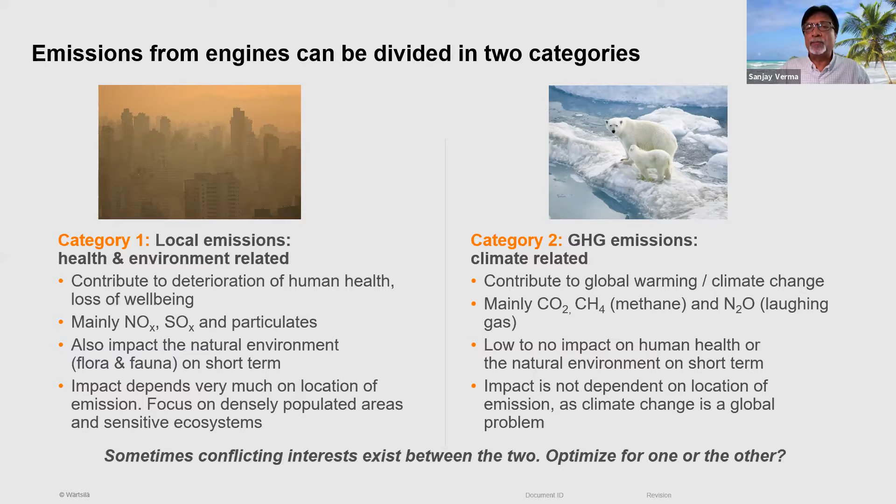IMO, in 2018, came with an ambition level to reduce global shipping carbon intensity by 40% by 2030, and greenhouse gases by 50% by 2050, gradually phasing it down to zero within this century. This is to ensure that global warming remains between 1.5 to 2 degrees Celsius. Well, that is the regulatory part of the drivers.

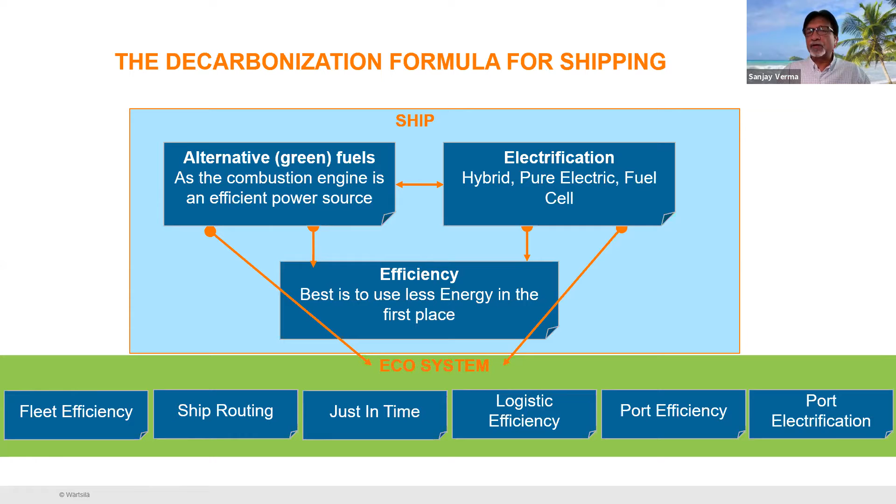But if the ship is efficient and the ecosystem is not efficient, then again, there is a problem. The fleet efficiency: the ship can come very economically or efficiently till the harbor, but if it has to wait for 10 days at the harbor, then all the efficiency is gone. If it comes to port and the cargo is not ready, again, there is a loss of efficiency. So the ship and the ecosystem should communicate. And that is the focus in decarbonizing shipping. So you decarbonize the ship and make the ecosystem efficient so that you take care of all this waste in the industry and turn it into efficiency.

Now, when we look at the ship, there are two parts again. One part is the fuel pathway and the other part is the vessel itself. So you look at how you generate energy on the ship, how you distribute energy on the ship, how you reduce the need of energy to go from point A to point B, and how you optimize the voyage itself by having good inputs of weather, how the sea is, and availability at the port, so that you can optimize your voyage itself.

Then going on the fuel side of it, there are two pathways. One is the liquid fuel pathway, and the other one is the gaseous fuel pathway. How we see it today, we are calling LNG a transitioning fuel, and tomorrow it will transition into other future fuels, which are either zero carbon or carbon neutral fuels. Same goes for liquids: today we have heavy fuel and gas oil, and in future we can see liquid biofuel or methanol or synthetic methanol. So there are two pathways for the fuel as well.

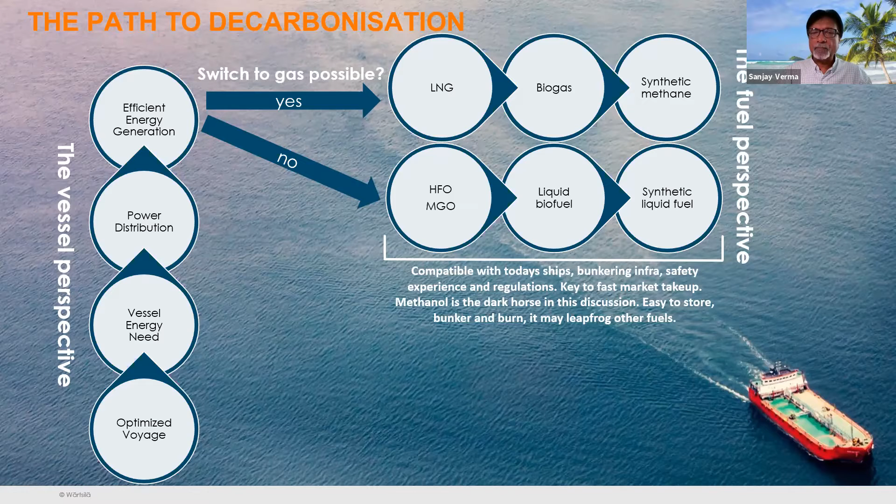So when we are looking at these fuel options, what are we looking at in future? We are looking at LNG, ammonia, methanol, and hydrogen. These are the four most talked about fuels today for the future. Especially for ammonia, methanol, and hydrogen, they have to be green, not the ammonia or methanol that you get today. Those are made from fossil fuels, so they are dirtier; their footprint is much more than that of your heavy fuel or diesel fuel.

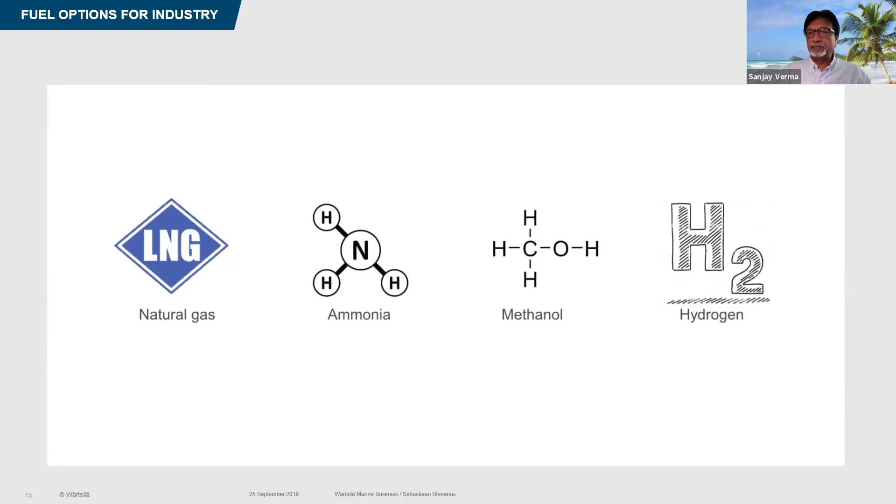But they all have different properties, and these properties are not all good. Say, for example, we look at storage. When you're looking at hydrogen to be stored in a smaller volume, it has to be liquid. And if it has to be liquid, it has to be super cryogenic, minus 253 degrees Celsius. Today, we are having problems with LNG in storage, but hydrogen is much more cryogenic than that. Then ammonia and methanol are somewhere in between. Methanol is the best fuel among these four when it comes to storage.

But then you look at the other part. The heating value of methanol is 3 times less compared to the fuel that you are using today. So again, it has some problems. Ammonia is there, but again, it has problems in its toxicity and how to burn it. It has a corrosive nature as well. So all these have different issues, and then availability is the main challenge of the green or zero carbon footprint fuels.

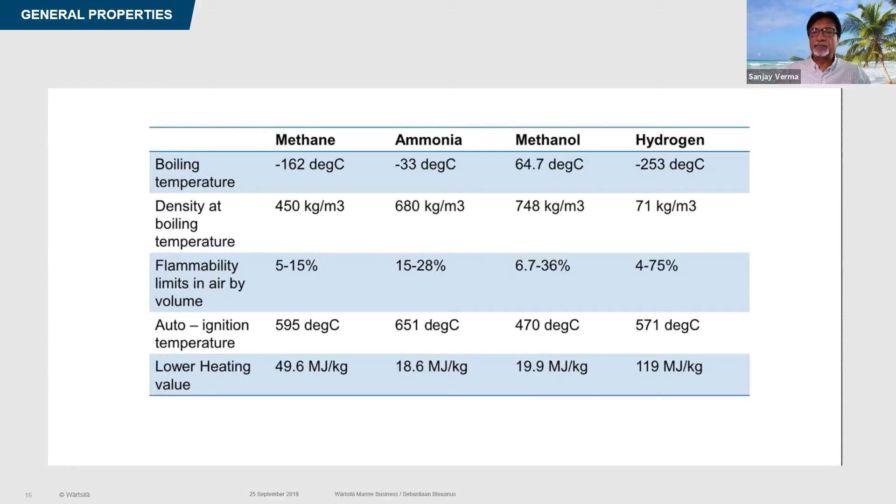So just to represent it in a graphical format, for the same volume of fuel which you carry on the ship, with hydrogen you can go for 5.3 days, and with LNG you can go for 14 days, and both ammonia and methanol are somewhere in between. So in future you would find that it won't be a single fuel future. It will be a mixed fuel, depending on the ships, which are very different. There are certain ships plying near the coast, those plying in the harbor, and then you have international shipping. International shipping will follow a different pathway, but coastal and near shore vessels may have a different fuel in the future.

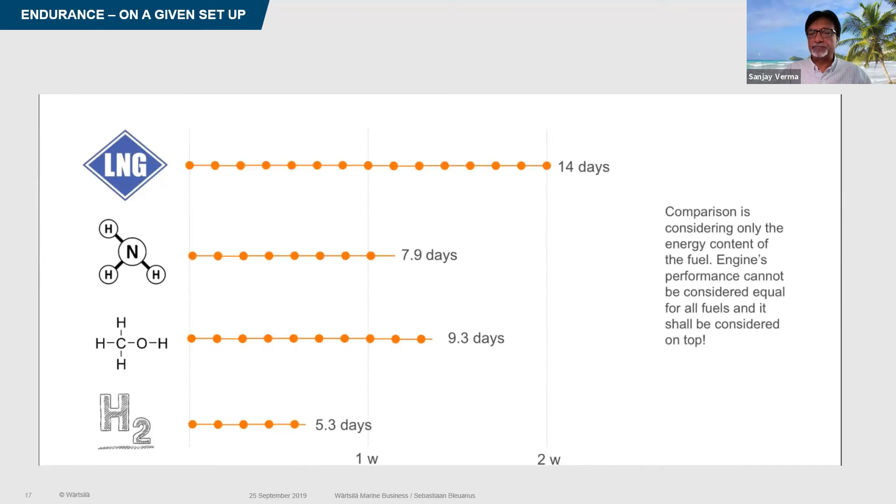Looking at Wärtsilä, where we are in terms of these fuels: when it comes to LNG, we have had these engines since 1986 actually, and in the marine industry since 2003, and we have more than 4,000 engines operating. So this is a well-established fuel for Wärtsilä, and it also has a proper pathway from fossil LNG today, to bio LNG tomorrow, to synthetic LNG in future. So it has a pathway to go till 2050 as well.

Methanol, we have been running this engine on methanol since 2015. So we have an experience of more than five years actually, and this technology is proven. We know how to burn it, but today the methanol that we get is again not a green methanol.

Ammonia: we have already started testing on ammonia, and we already have an order to supply an ammonia engine within 2022. So the testing has started. The real engine test will start next month, and next year we will be delivering this engine to a customer in Norway.

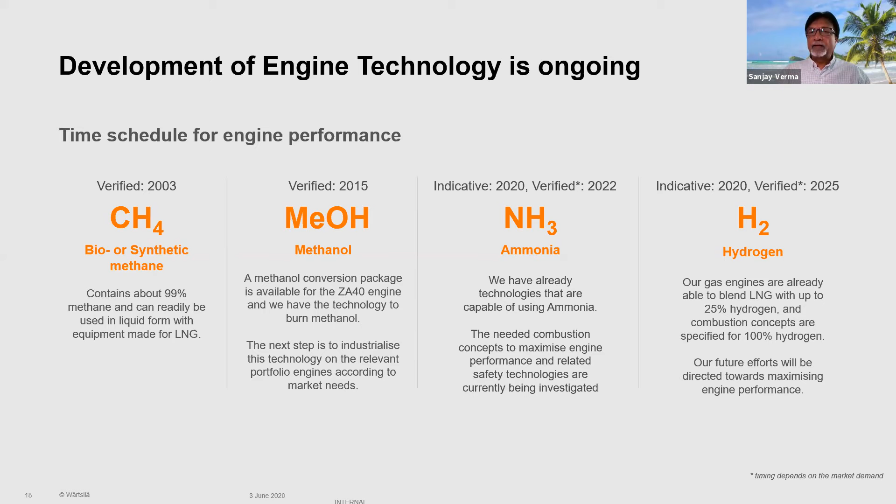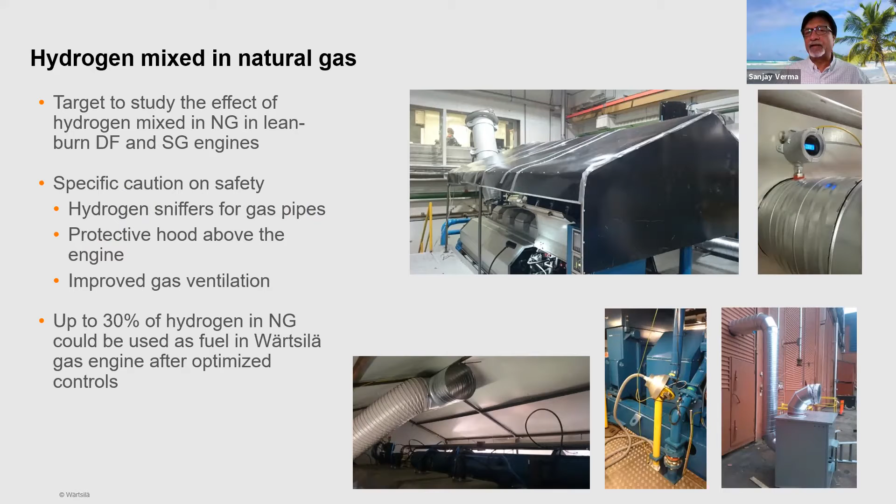Hydrogen: we have already tested a mix of hydrogen and ammonia, and hydrogen and natural gas, and we have burned a ratio of 30% hydrogen and 70% natural gas on our engine. We are testing a hydrogen engine, gradually increasing the hydrogen share, going up to 100% hydrogen. And this will happen, but we don't see it coming in the marine industry. The offtake will be more in land-based power plants, where gas and hydrogen can be supplied in pipelines.

At the same time, we are testing all other fuels as well. As I said earlier, LPG, methanol, ammonia, these fuels are being tested, and within the time frame I showed earlier on the slide, these engines will be ready.

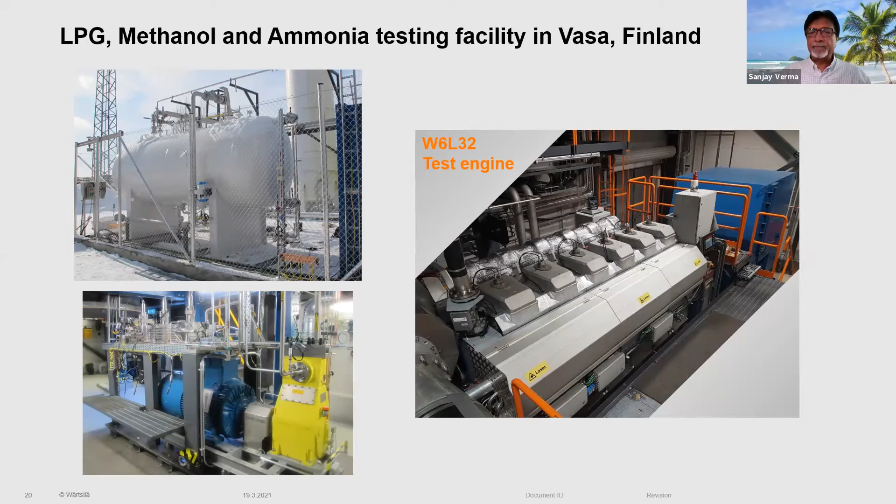Now I will go on to the energy efficiency part of the vessel. You will be hearing more and more about hybrid, and this is coming because of cost efficiency, lower operating and maintenance cost, and flexibility, because it can use the energy source available today and has provision to use the energy source of tomorrow. And of course, it is all being driven by environmental regulations. So it reduces your environmental footprint as well.

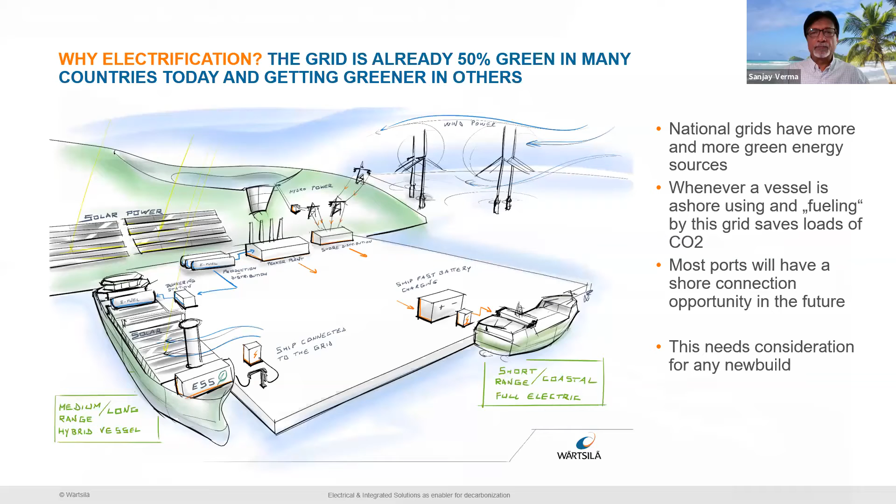Another industry which can pick up in Singapore very fast is electric or hybrid ferries. We see a lot of small ferries moving around Singapore, and these can easily get to this level of electrification or hybridization.

Another area of electrification and hybridization is port support craft, whether pilot boats, tugboats or other smaller boats which do not go far from the coast and could be charged from shore. There is a tendency to go hybrid as the first step, and the next step is electrification, a totally electric tug. So these are happening, and these will be the future, because it also provides a financially acceptable investment, meaning there is a return on your investment. So apart from meeting the environmental regulations, you also need to meet your financial points.

Then this is another area to make the ship more efficient, and we see more and more requirements. As you can see, most of the ships are struggling to meet the EEXI ratings which have been introduced by IMO, and further down they have to meet the carbon intensity, so they have to make the ships more efficient.

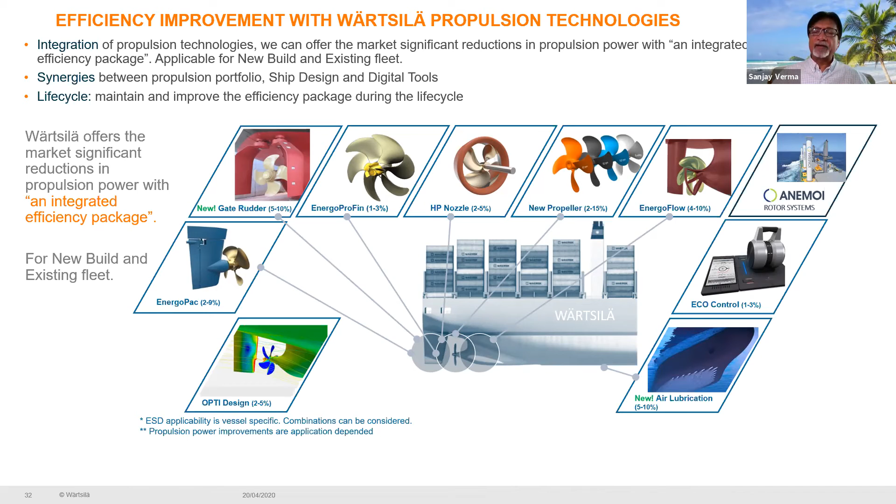Just to give you an example, on an existing vessel, by having a combination of these, you can improve the efficiency up to 10 to 18%, as you can see here. And the ROI, meaning the investment, is also within acceptable limits. And then again, the carbon dioxide reduction from the ship, which is required to meet the carbon intensity indicators.

Then again, this is another area where local industries can look at providing shore power. The more vessels are going to be electrified, the more will be the requirement for these. This is essential for the shipping industry to go towards electrification.

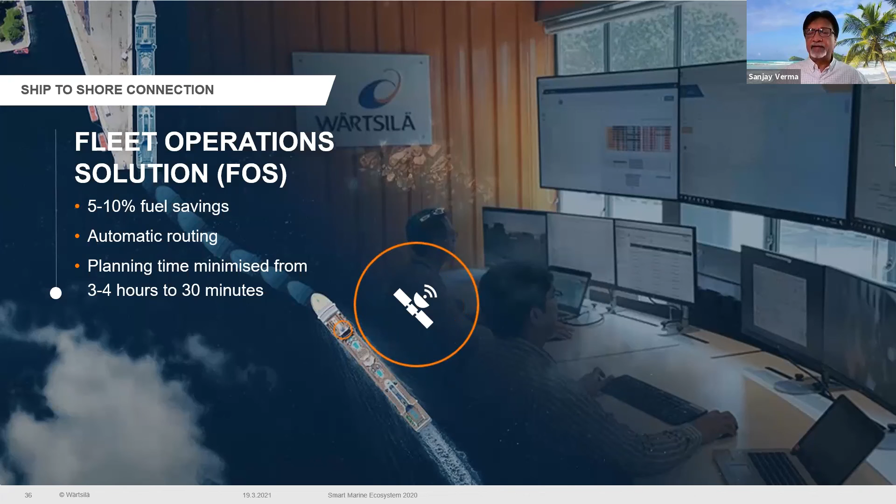Then there are these digital solutions, which are fleet operation solutions, weather routing, and electronic charts, where you can get real-time information on the weather and then improve your fleet efficiency. So this is more on the ecosystem which I was talking about. This is another example of just-in-time arrival, where ships can optimize their speed so that they don't have to wait; they go straight on to port. This not only improves the efficiency of the vessel, but it also improves safety when there are not so many ships at anchor.

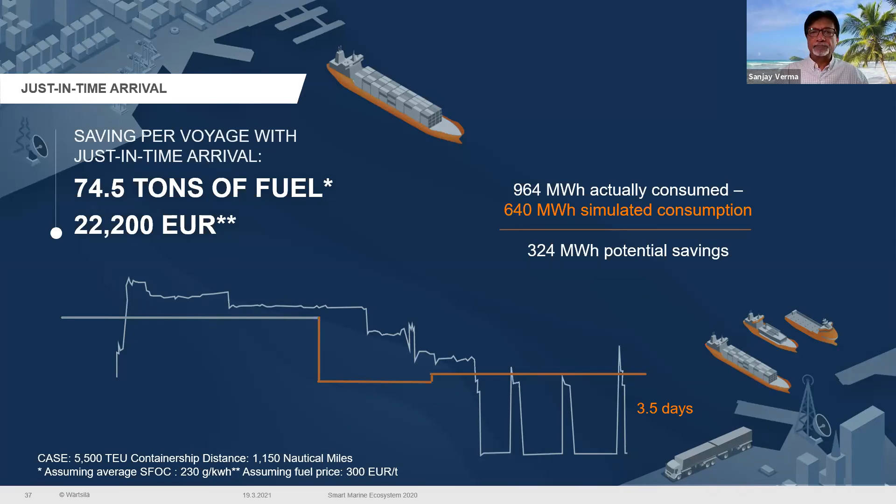So coming to the key takeaways, or a summary of what I talked about: there is no one single future fuel. At least the path is not clear as of now. There will be a variety of fuels in use, depending on short sea shipping, international shipping, or harbor shipping. So there will be different fuels in the future.

What needs to be done is that you think wisely and invest in fuel flexibility, because a ship has a life of almost 25 to 30 years, so that your vessel doesn't get stranded in future because of the regulations, because the regulations are going to tighten even further. So you have to keep that in mind and look at ways to make sure your vessel is not stranded. We feel that the dual fuel engine that we have is the right choice at this moment because the pathway is not clear, and it allows you to go on either the liquid pathway or the gaseous pathway as it becomes clearer in future which pathway is the best.

Energy saving devices will play a key role in reducing the carbon intensity, as I mentioned. Energy management hybrid solutions will be the popular choice for all kinds of vessels. It may not be so much for the larger ships, but it will very much be part of small to medium sized vessels. And at the same time, battery technology is improving and fuel cell technology is improving, so you might see it gradually going on to international shipping as well.